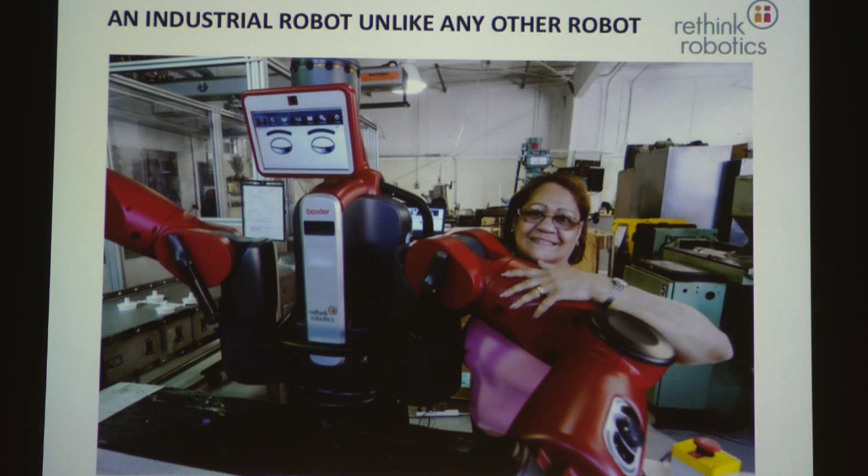Baxter is an industrial robot, and it's a little different from other industrial robots. I want to tell you how I came to this, how we came to this, the company Rethink Robotics. I'll show you some videos of it, show you how people use it, how you can use it as an industrial robot, some of the things it can do, and where we think it's headed.

This is a real factory worker in a real factory. She had met Baxter not too long before, and had learned how to train it to do tasks in the hour she had known Baxter, and she seemed to like the robot a lot.

So I want to tell you two themes which got me to the problem that we've been trying to solve at Rethink Robotics. We were originally called Heartland Robotics, but we renamed ourselves to Rethink Robotics. The two themes are human-centric robots and the question of how we manufacture our consumer goods. I'm going to talk about those two themes for a little bit.

Back when Matt and I were young, long before most of you were born, ordinary people couldn't touch computers. They were hidden away behind glass walls, hidden from ordinary people because ordinary people were dangerous to computers. Back then everyone smoked, including Matt - I think he still does. Everyone smoked, and the smoke particles would get into the disk drives and cause the disk platters to crash because they weren't sealed drives. So you had to keep people away.

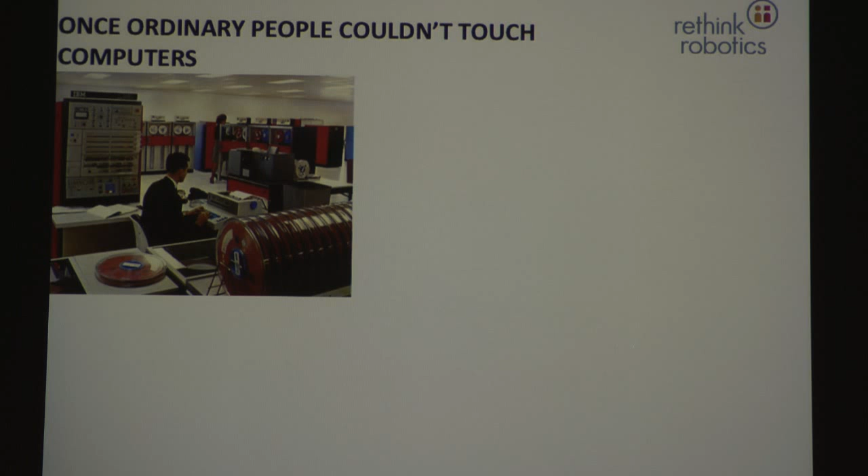But what it meant was, if you were an office worker, the only contact you had with computation was you might get this fan-fold printout with sales reports or something, but you couldn't get access to the information. You couldn't control how the reports were produced. That had to go to this priesthood in the back room - to systems analysts, to programmers, to punch card operators, to computer operators. But then around 1980, things changed, and ordinary people did get to touch computers with the Apple IIe and the PC that came along.

Over the next 30-some years, there's been a complete flourishing of computational forms. The amount of computation that everyone interacts with on an everyday basis has totally changed. It's been an empowerment of ordinary people. Ordinary people get to control information. They get access to it. They're part of the loop. It's not just fed to them.

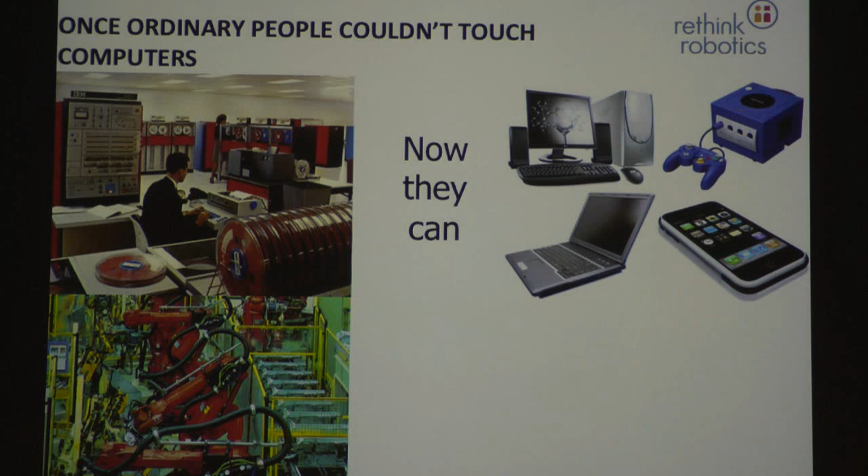So robots, especially industrial robots, are sort of like those mainframes. They're kept away from ordinary people, this time because the robots are dangerous to the people. We'll talk about that in a little bit. But what if ordinary people could touch robots?

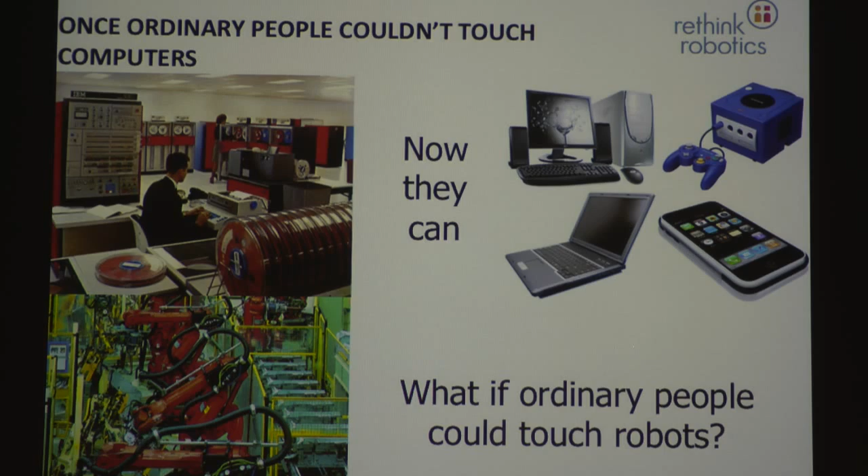Well, to some extent, they now can. Over the last 10 years or so, there have been a bunch of robots get out there that ordinary people can touch. The top left is the Intuitive Surgical Da Vinci, and a surgeon touches the robot. Now, you may think a surgeon is an ordinary person, and they may have a different answer than you do. But anyway...

Ordinary people touch the robot, and then the robot touches ordinary people. For guys like me and Matt in our age group, if we get prostate cancer, we're going to have a Da Vinci operate on us. That's the standard way it's done in the US now.

On the right-hand side are Kiva Systems robots from a company in Boston, which was recently sold to Amazon, where the robots move the shelves around at fulfillment centers, because robots can easily go in straight lines, pick things up, and bring them back, and the person does the hard task of grabbing out of the bin to pack out the fulfillment. Lots of things that you buy online now come to you through this robot system.

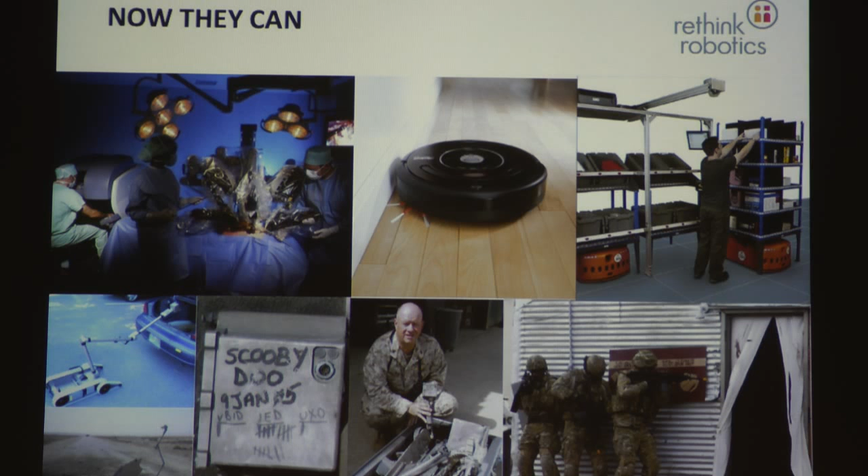In the middle is home cleaning robots - I'll talk about them in a minute. And then a big change in the US military in terms of ground robots over the last 10 years. In fact, in unstructured environments, there's been a tremendous uptake of robots over the last 10 years. Ground robots in the US military: June of 2002, zero, and now over 12,000.

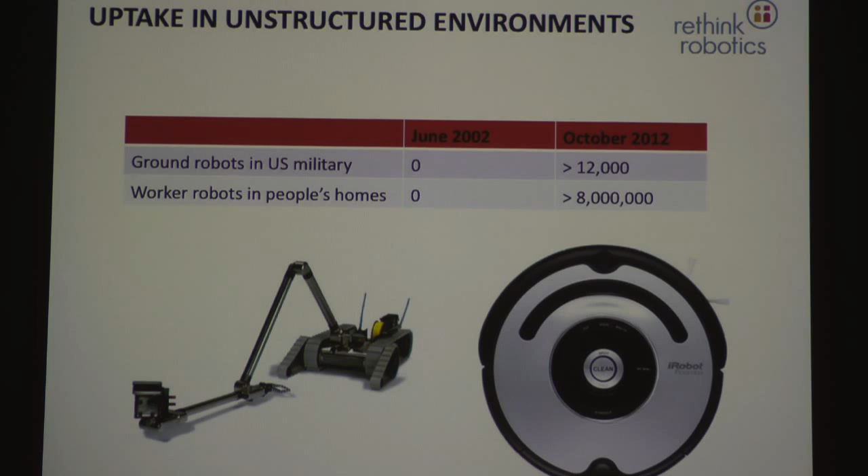Worker robots in people's homes - I said worker robots because I don't want to count the Furby, there were Furbies around before that. But robots that actually do work in people's homes went from zero to more than 8 million, just from iRobot alone. There are other companies that have also produced them; I don't happen to know their numbers.

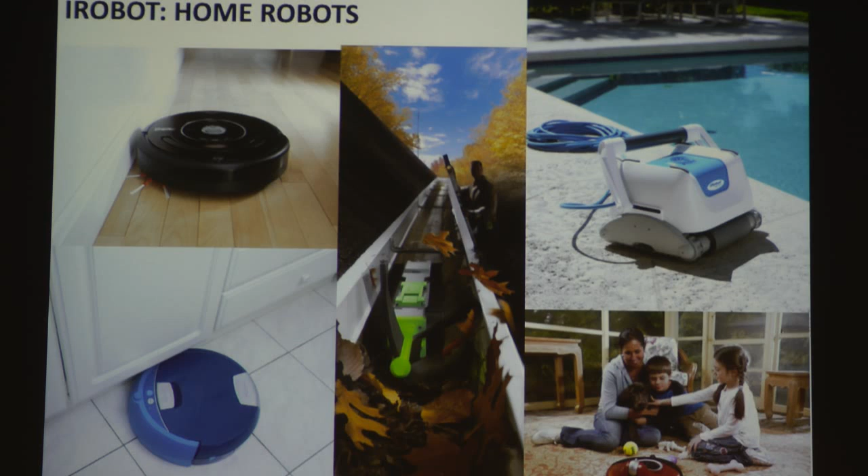Why have things taken off over the last 10 years? I think for a number of reasons. Computation has gotten, and sensors have gotten, exponentially cheaper for the last 50 years. We know about Moore's law. But sensors have also gotten cheaper and cheaper, driven by non-robotic applications. I don't suppose Hans Moravec is in the audience - is Hans here?

When I first came to the United States in 1977, I went to Stanford University, and Hans Moravec was there with a robot with a camera on it. The camera cost $50,000. He was trying to do stereo vision, so he had to mechanically drive the camera from left to right to get multiple images because cameras were so expensive, and computation took hours. But $50,000 for a single camera.

A couple of years ago, I saw a camera advertised online, a webcam, for $2.99. I checked, did it include the USB cable? It did, $2.99. I ordered half a dozen of them, I just had to see these things. And why order one and pay the shipping when the shipping was the same for $6? I got that camera, plugged it in. It was a pathetic webcam, but it was way, way better than that $50,000 camera from 35 years ago.

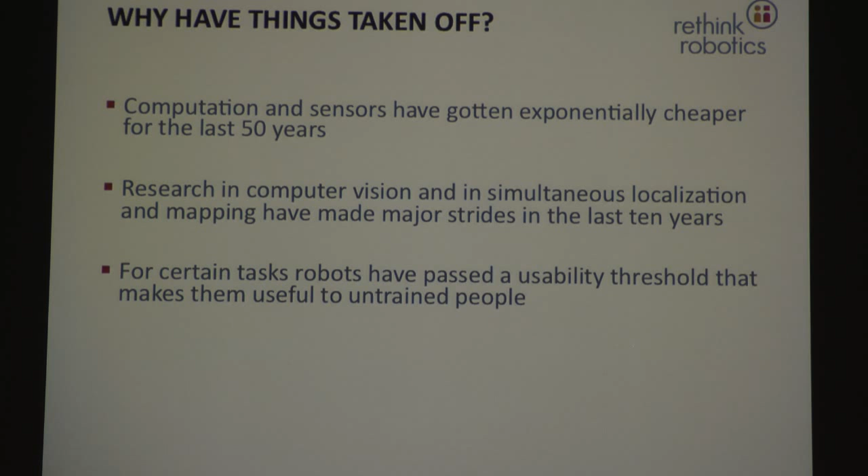Computer vision and SLAM, simultaneous localization and mapping, have made major strides in the last 10 years. That's a technology which has enabled robots to be more effective. And lastly, for certain tasks, robots have passed the usability threshold so that ordinary untrained people can interact with them. You don't have to be a specialist to use the robot for certain classes of tasks.

And I learned 2 lessons from the iRobot experience. I learned lots of lessons, but 2 that count for today. The first involved the fact that the Roomba on the right, that was the first Roomba, was not the first home cleaning robot. Electrolux had a €2,000 home cleaning robot out before the Roomba.

It weighed about twice as much. It was actually 13 centimeters high, so it didn't fit under the kickboard that you have in your kitchen, that your toes go under. It didn't fit under there, whereas the Roomba was only 9 centimeters high and did. But the important thing was the Roomba was $200 compared to €2,000. Disruptive price point. It went from being a luxury item, and in fact we chose the number $200 first before designing the robot because we realized that was the threshold at which a person could spend money without checking in with their spouse whether it was okay.

That was a serious thing because then it became an impulse purchase. But a €2,000 robot was not an impulse purchase, and it had to be much more useful at that price. So the first lesson is disruptions can create new markets, because people didn't think, oh, I want a robot vacuum cleaner. The market was created by it being disruptive.

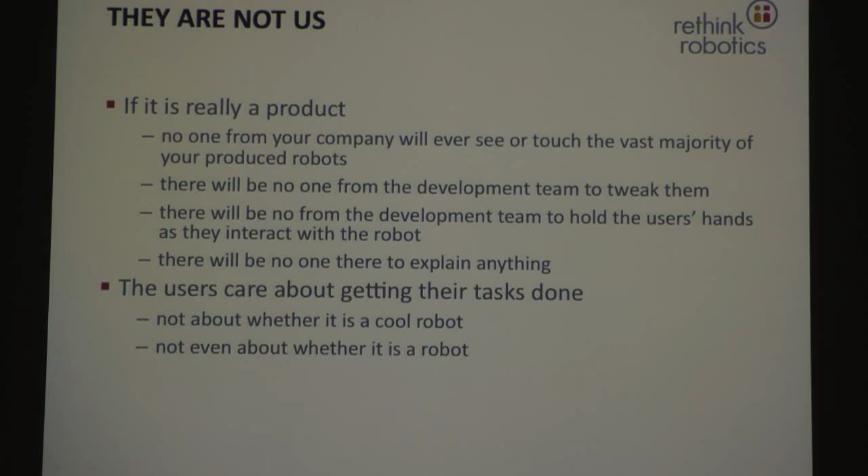Second thing is, the users only care about getting their tasks done. They don't care that it's a cool robot or not, they don't even care whether it's a robot. They want clean floors or something like that. Whereas technologists, engineers think, oh, but it's a cool robot, surely you're going to pay a lot for it.

Real robots have real users. That was the second thing that I learned. Real robots have real users. And so I class PhD students as unreal users. Sorry, but you are not real users. You're special, you're the ones who create the technology. That's not the end user. They're not us.

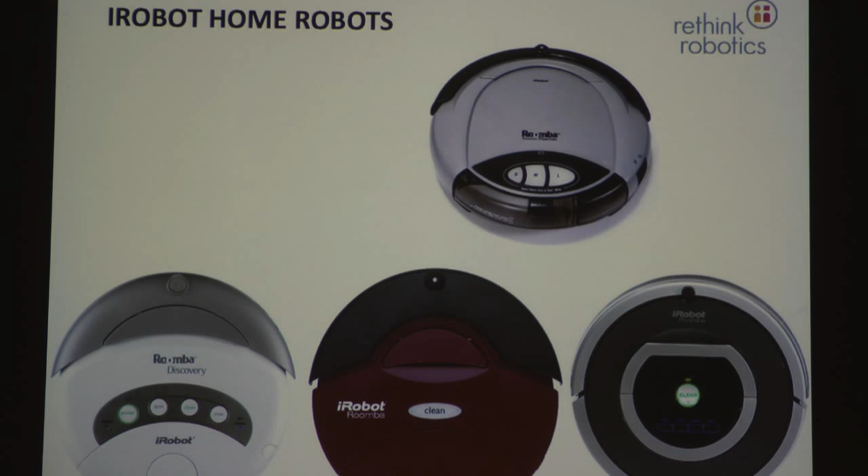So if you look here at the Roombas as they went from the top right across these later and later models, you may notice that the complexity of interacting with them got simpler and simpler. The first one had a toggle switch on the right for off-on. We got so many telephone calls on the support line: which way's on, which way's off? That was really hard. What does SML mean?

Small, medium, large room. So by the time we get to the bottom there, you can go deeper if you want, but the simple way to use the robot, there's just one button in the middle that says clean. There's no on-off switch, and this is important. You just press the clean button and it goes and does a task. You can specialize a little more with some other smaller buttons, but the simple use is just press the clean button.

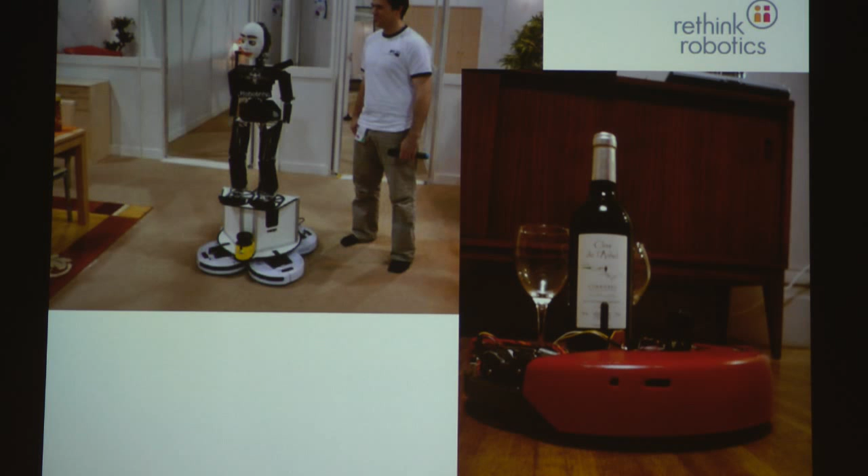Now, when you put robots out there, people do weird stuff with them too. On the left are the iRobot Creates, which we meant people to hack, we meant people to do weird stuff with. Other people just hacked them anyway, and they did variously interesting things or not. But they also used them sometimes in strange ways we didn't anticipate, and they didn't realize they were using them in strange ways.

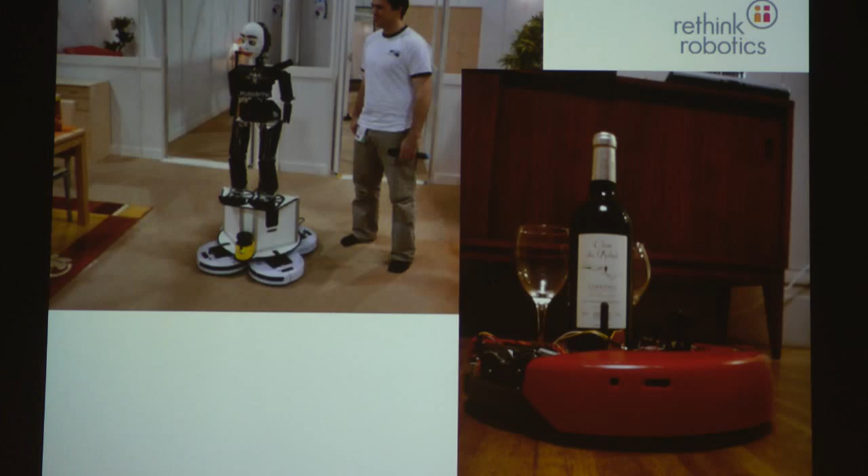One of the things we had was a virtual wall. If you want a robot to clean this floor and not go out that door over there, you put a virtual wall, an infrared beam, crossing the boundary, and the robot won't go out and wander off that way. So you can partition off parts of your house to keep the robot contained.

So one of our people was in Denmark and heard that at a government elderly care facility, all the floor cleaning was done by Roombas. This sounds interesting, let's go see how they do this. He went and saw the woman in charge of cleaning. She was very happy with her Roombas, she loved them. He just wanted to see how she used them, so he asked to watch.

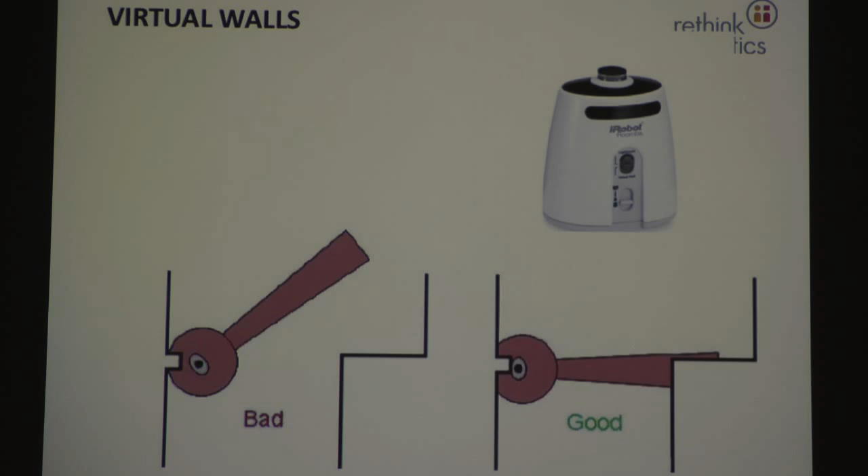The first thing she did was get a virtual wall, turn it on, press the clean button, and then put the virtual wall on top of the robot. She had multiple ones of them. And what this actually did, she had no idea - she thought that's how you were supposed to use them because she hadn't read the instructions.

Now, I don't know if people know the Braitenberg Vehicles, that book from 1984 about simple robots. She'd built Braitenberg vehicles out of these things so they'd stay away from each other and spread out and clean the floor. But that was purely accidental.

We also had a lot of robots in Iraq and Afghanistan dealing with improvised explosive devices. And they're real users - 19-year-old kids out there, soldiers, US soldiers, bullets flying past their heads, using these robots. Up until the early 2000s, the youngest kid in the squad had to put on a bomb suit, rope around their belly, go out with a stick and poke things, which ended badly often. Now, a robot has to be sent out.

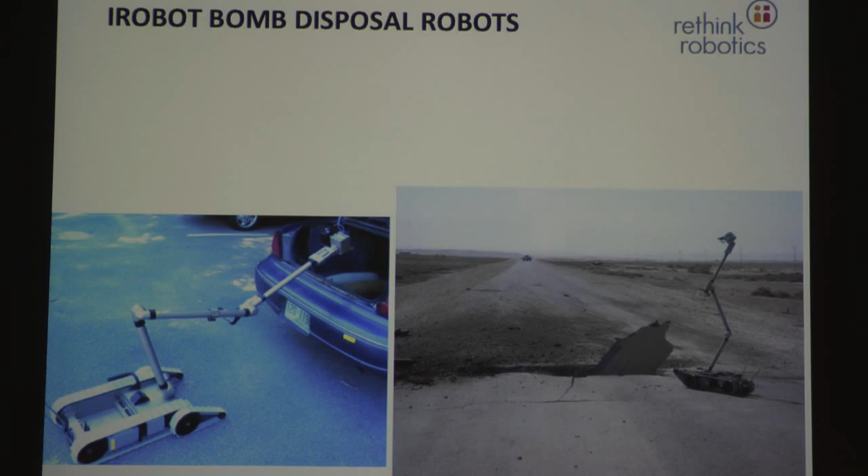There were two major sorts of robots in use in Iraq and Afghanistan, one from iRobot in Massachusetts, another from Foster Miller in Massachusetts. It's sort of surprising how the competitors come from right next to each other, owned by QinetiQ now. And we knew our robot was fully digital, had Ethernet. It was a much cooler robot than that stupid Foster Miller robot. It was a good robot. Their robot wasn't very good.

But word came back from the field that our user interface, which was really, really good, sucked - that was the word - compared to the Foster Miller one. Well, one of the iRobot engineers said, well, we need smarter users then. Okay, that wasn't the right solution.

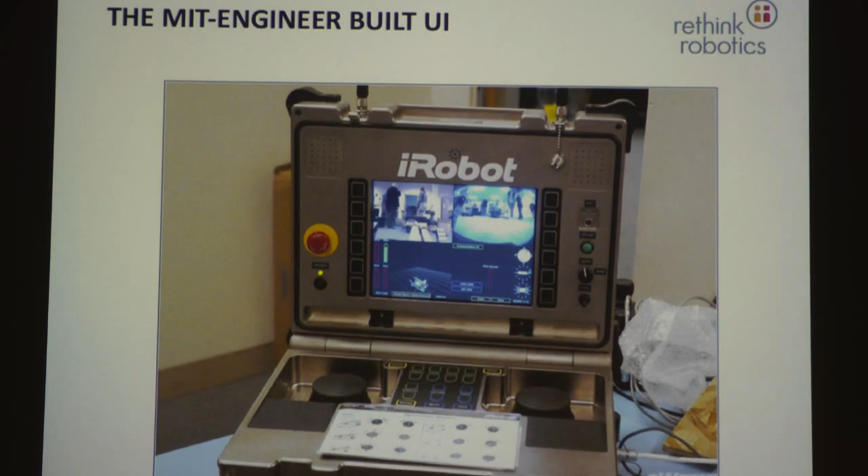The right solution was to put a game controller on the robots. Five minutes of practice without any documentation, and the people in the field got to use the robot effectively. They had maybe 85% of the capabilities of the robot - the engineers knew more, but they don't know how to do these other things. Before, with months of training with the complex interface, they never got to 85%. Now they got to 85% in 5 minutes. It's like the clean button. Match something to where the users are in order to make it usable, and you get much more effective use and much better uptake.

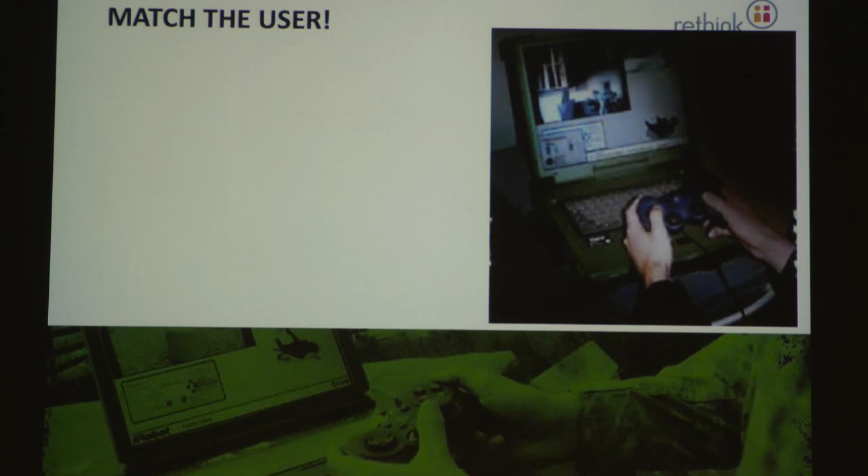That was the first theme, user-centric robots. Second theme: I had been going to China since the mid-90s to look at low-cost manufacturing, first to manufacture robot toys, which we used to make, and then to manufacture Roombas.

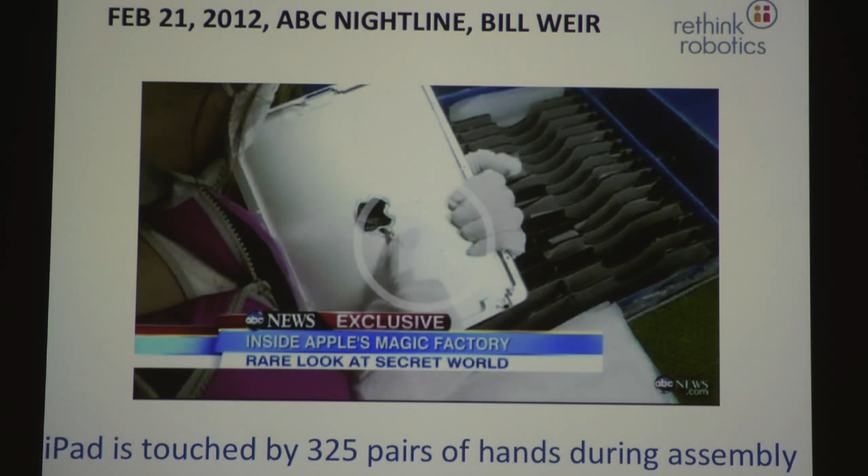February of this year, ABC Nightline did a report on how iPads are built, and they pointed out that 325 pairs of hands touch an iPad during assembly. So the stuff we buy, the consumer stuff, is still made by hand.

What year is it again? Still made by hand. Lots of things have been done by hand in history, and then they're not. A lot of farming used to be done by hand, and now it's done by tractors, etc. But there's other stuff that used to be done by hand.

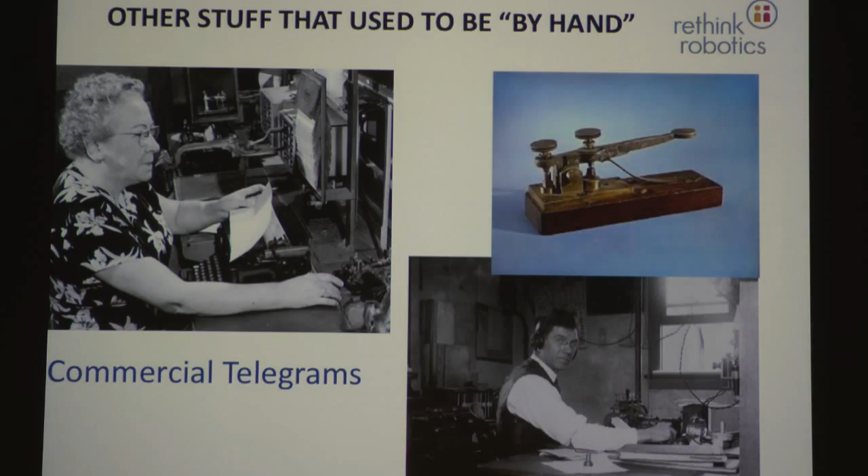Has anyone heard of telegrams and the telegraph? Commercial telegrams: there was a person who would read stuff and use that key in the right-hand corner to turn words into a signal that went over the line, and then another person would listen to the signal, transcribe it, and get the telegram out. Does anyone know how long we used telegrams for in this country? They sent messages by hand.

We started January of 1838 - that's when the first commercial telegram was sent. Anyone guess when the last commercial telegram was sent in the United States? 1979? No, it was January 2006. Good try, but it took a damn long time for the internet to kill off those telegrams. The internet's a little faster than telegrams, but eventually it did.

So my question is, after 168 years, when will we stop building our stuff by hand - the stuff you buy at Walmart? When will we stop building that by hand and use machines instead?

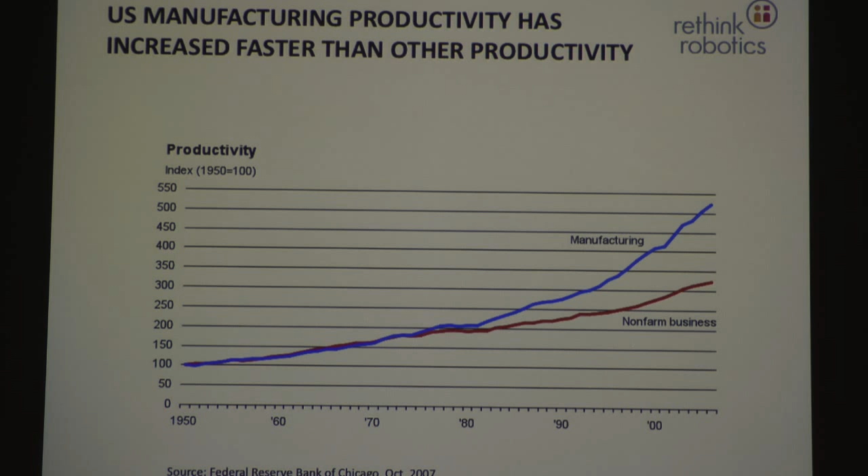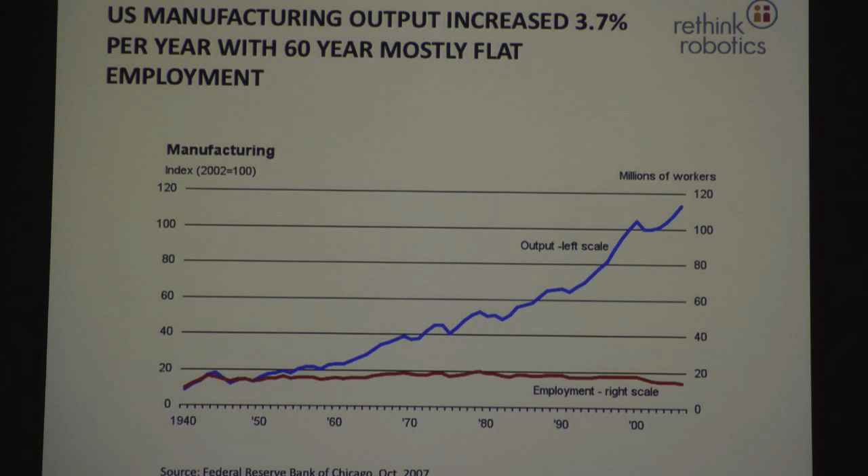By the way, US manufacturing productivity has increased faster than other productivity in this country - it's increased very, very well. US manufacturing output has increased roughly 3.7% per year for 60 years, which is a pretty good run of increase in productivity, with mostly flat employment. It's gone down a little recently.

In fact, there's a great statistic - the cost of an airplane for the US military versus the US defense budget, and they cross in 2054. The whole US defense budget at current projections will buy one airplane. Now, fortunately, the US defense budget's a big number, so manufacturing will still be healthy, but that's obviously not sustainable.

Since World War II, we have outsourced manufacturing to low-cost labor regions - first to Japan in the wake of the Second World War, and then as things got back together there and the standard of living went up, it moved to South Korea. As the standard of living went up there, it moved to Taiwan, then to southern China. By the time I was building toys in China in 1998, 1999, the plush sewing part was too expensive to do even then, and had already migrated down to Vietnam.

So there's this constant move to low-cost labor, and behind it an increase in standard of living, and new consumers come up behind. Well, where do we keep going to? Meanwhile, Thailand has had a total industrial revolution in the last 30 years. As manufacturing spreads to Indonesia, Malaysia, you're sort of running out of places to exploit.

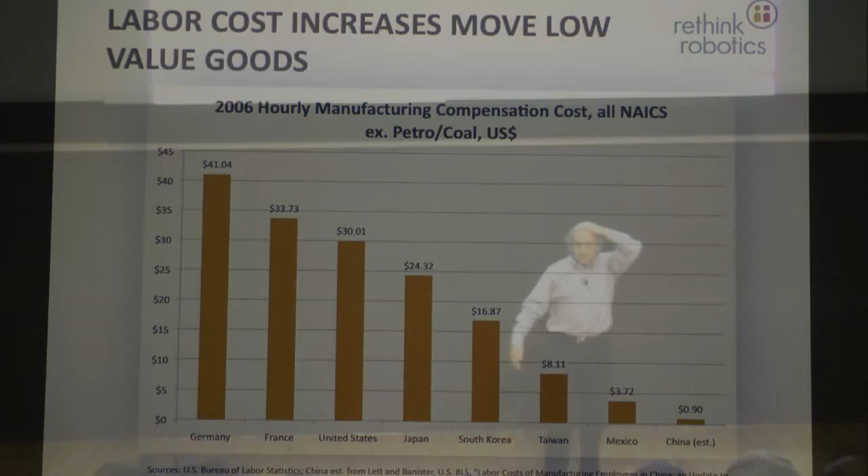In fact, you can see the history of manufacturing in the hourly cost of labor - you can see exactly the march, and these numbers keep coming up. This is from around 2003, 2004, or 2006 - 90 cents an hour was the total cost of manufacturing in China. It's now up to about $3. It's increased rapidly, and you've probably seen stories from Foxconn, which makes the iPad and iPhone, that wages have gone up dramatically in the last 2 or 3 years there, because the workers are saying enough's enough, we need to be paid better for this.

So what will it take to break out of making cheap stuff by hand? I'm a robot guy - the answer is a robot. Ask me any question, the answer's a robot. I admit it.

I wanted to say, we've sort of gotten into this thing here in the US where we talk about advanced manufacturing, but I think we make the mistake that advanced manufacturing means manufacturing advanced stuff. You can also use advanced manufacturing for manufacturing low-tech stuff like saucepans, etc.

I gave my punchline of robots three slides too early. Sorry about that. It's a brand new talk. It really is.

But there's also a bunch of pressures saying that we should manufacture in the US. One is responsive short supply chains. When you manufacture something in China, you have to say 29, 30 weeks ahead of time how many you want of a particular item to appear on a store shelf 29 or 30 weeks later.

And by the way, now every retailer wants their own pack out. So the Costco box has to be a different box with a load more stuff in it than the Sears box or the Bed Bath & Beyond box or whatever. So 30 weeks ahead of time, you're not only predicting how many things you're going to sell, but how many you're going to sell them in each retailer. And at iRobot, we were making stuff for Linens 'n Things, and they went bankrupt before the stuff arrived.

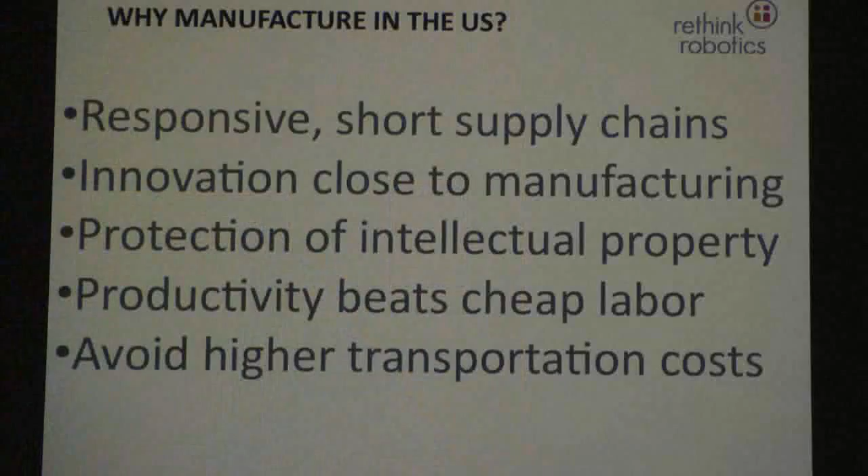And lastly, the only prediction I will make, I won't predict whether our robots will succeed or not. I predict cost of oil is going to go up in the long term. I'm confident of that prediction. And in 2008, when there was a spike in oil prices, most retailers in the US lost their margins completely to oil surcharges. There's all these reasons to bring stuff back to the US, and now my answer, combining these two themes, we'll use robots to do it.

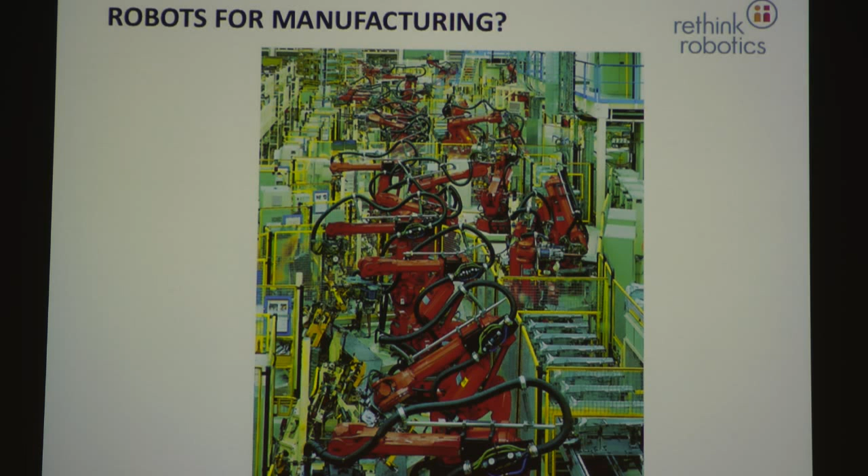Okay, that was what I was trying to get to, but these robots can't be the same sort of industrial robots we have today, the mainframes that are away from ordinary people and ordinary people can't interact with or program. The world's first industrial robot, by the way, was the Unimate, made by a company, Unimation, Universal Automation, first installed in a General Motors factory in New Jersey in 1961. Later, Unimation was bought by a Pittsburgh company, Westinghouse, and then sold off to Stäubli.

But back in 1961, there were a bunch of technology limitations. There was no computer. Computers were too expensive. They used ladder logic. And there were no sensors. So the robot did the same motions repetitively. And industrial robots, to a large extent, still do that. They don't have sensors on them. They don't come with many sensors. You have to get a systems integrator to put other sorts of sensors and software packages.

But they're unsafe for people to be around. They're engineered to be precise and repeatable, and what they do well, and they do amazingly well, is follow a trajectory accurately, repeatedly. They'll follow the same trajectory to 0.3 millimeter accuracy for 10 years nonstop. But they haven't been made adaptive or flexible or easy to use.

And you have to really structure the environment. You have to clean it up to let them operate. And the integration cost of getting the robot into the factory is 3 to 5, some people say as much as 10 times the capital cost of the robot because of all the other equipment you have to do, the way you have to reorganize your factory.

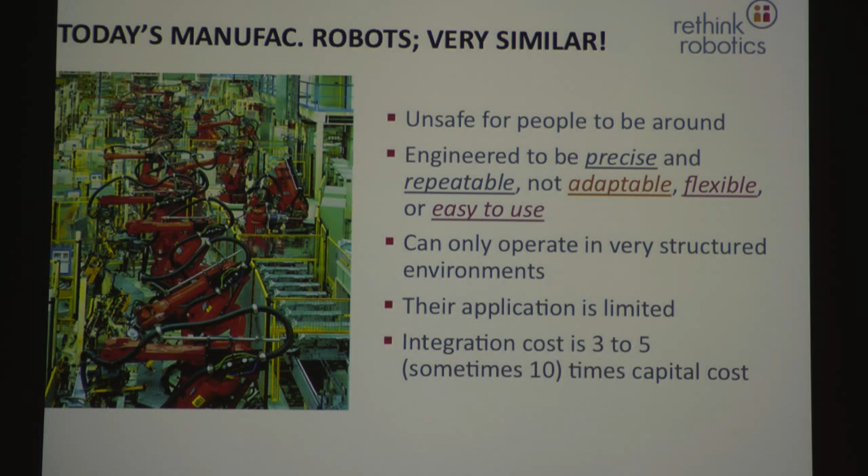So the industrial robots of today are nothing like what we see in our information technology. The information technology revolution hasn't come to industrial robots. And in fact, there's over 300,000 small manufacturing companies in the US which don't have robots because the cost of entry, the barrier to entry is just too high. They're too hard to use. You need consultants who understand quaternions in order to use them.

Now, everyone here at the Robotics Institute understands quaternions, but out there, in the real world, ordinary factory workers don't understand quaternions. Actually, maybe only Mike Erdmann understands quaternions, I'm not sure. And so the cost of getting them there, they only make sense for very long production runs.

So I decided that we would try to do something about these problems, make it easy for robots to go into factories. I started this company, now called Rethink Robotics, in September of 2008. It's based in Boston, Massachusetts. It's venture-backed. We announced our first product on September 18th, and we're just starting shipping now. I'll talk about supply chain in a minute.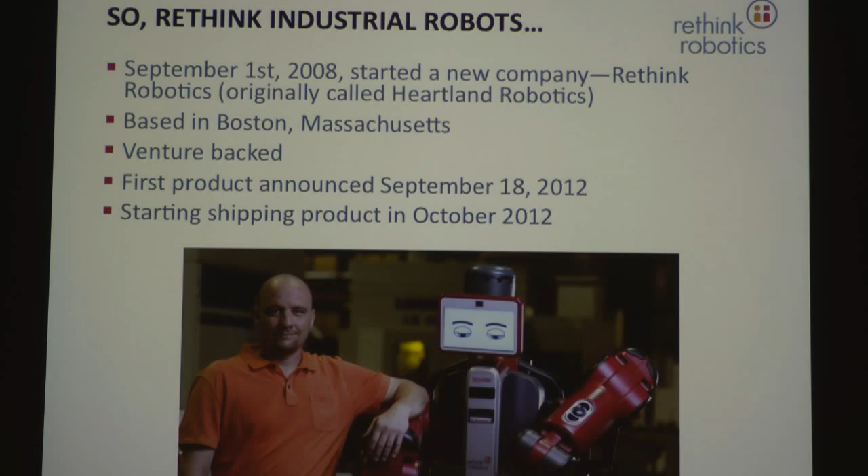We have had two visions. This will sound a bit like advertising, but it'll turn into technical stuff in a minute. We wanted to change robots so they could work with people easily and be very low cost. That gets back to disrupting a marketplace. Our idea is not to compete with current industrial robots, it's to go into those 300,000 American companies that don't have industrial robots right now and make it very easy for them to adopt one. So we're trying to make it easy to get robots into factories to keep jobs from migrating overseas.

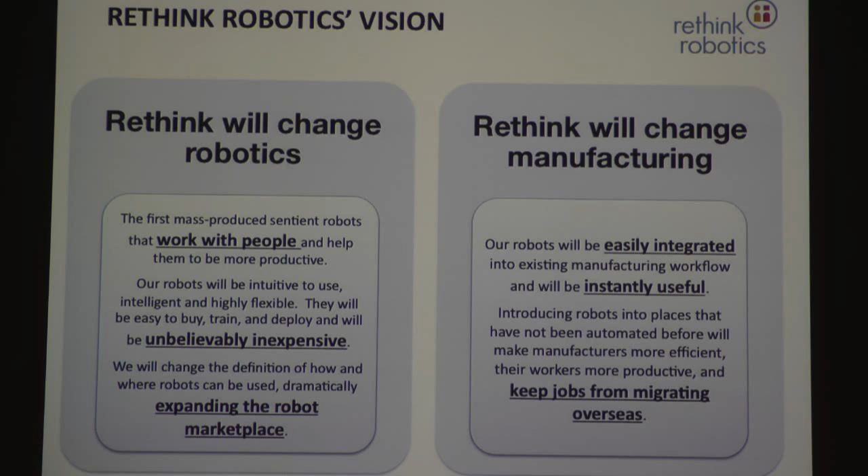It's got two 7-degree-of-freedom arms, each with force sensing, series elastic actuators. It's got cameras in each wrist, two cameras in the chest, and a camera above the face.

You don't need anything else to train or program this robot. You just go up and grab its arms, there's some knobs on the arms and on the sides if you want to twist them. And that screen with the eyes on it turns into a graphical user interface while you're training it.

The arms are compliant, so it's safe to be close to the robot. About a 5-pound payload, spec at maximum acceleration, straight out like this for 6,300 hours straight is what we're trying to do. And you can put on different end effectors, I'll talk about that in a minute.

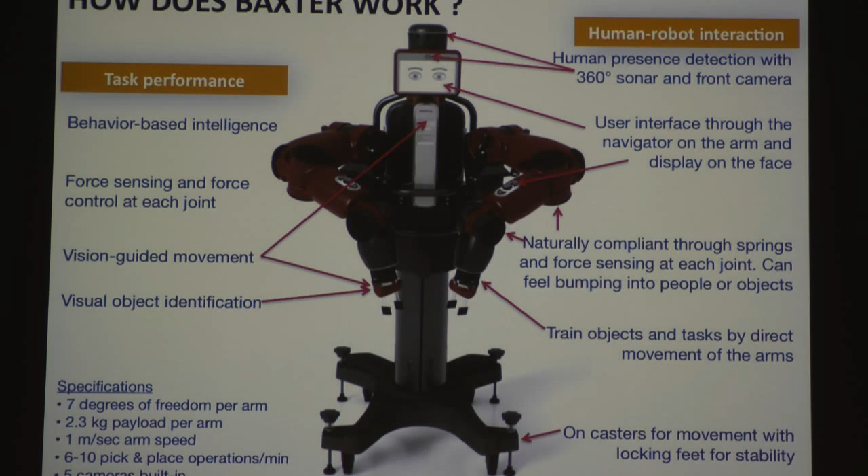It is not actively mobile. There's a base you can get which has casters, so you can push it around and set it up at a new workstation. The idea with this robot is you take it out of the box, set it up, and an ordinary factory worker trains it for some task in 5 or 10 minutes, and then it starts working. When 2 hours later you want it to do something else, you roll it somewhere else and get it to do a new task.

So it's a new category of industrial robot. No systems integration, the only interface it needs is a wall socket, a 110-volt wall socket. No programming, you don't program the robot, you train it, and I'll show you some video of that in a minute. It should be fast so you can change what's done on the line.

I was at an event, as was Matt last week, where one of the traditional robot companies said, yeah, we see the need for lines that get changed after only 4 months. But in these small factories doing small batches, they need to change their lines every hour or two, and that's what we're trying to do.

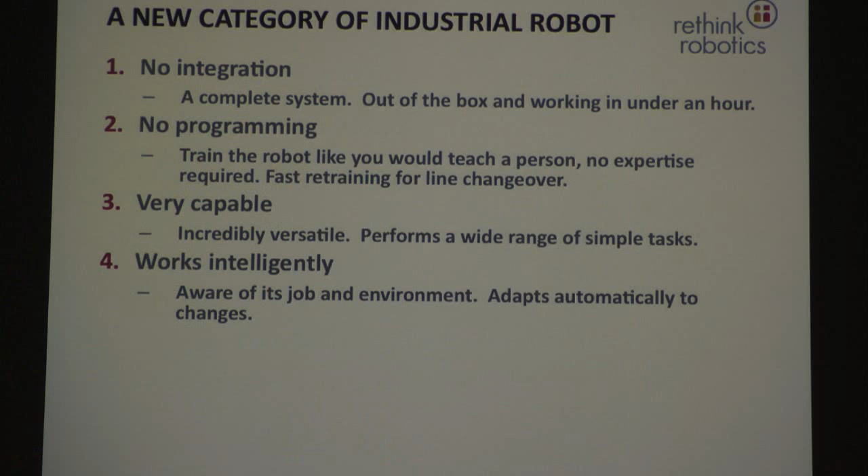Wide range of simple tasks. It's aware of its job and its environment, it's not just a machine unaware of what's happening. It knows about people, it knows about conveyor belts, it knows about boxes, it knows about certain categories that are in factories, and it adapts to changes.

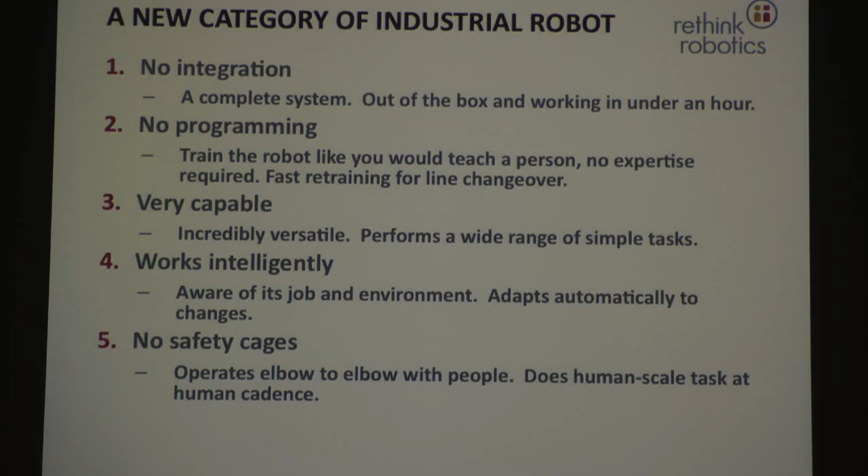Most importantly, it's such a nice robot you can be this close to it, right up with it, and it's not scary. I may be scary, but Matt doesn't scare me. So you can be elbow to elbow with it without safety cages.

And it's an extensible platform in that new software will come out and new people will build apps for it, which will increase its capabilities on the basic platform. So just a few technical things about it.

It has series elastic actuators at each of its joints. In a series elastic actuator, there's an elastic element somewhere between ground and the load, and you can put them in different places. This was an idea developed by Matt Williamson and Gill Pratt. Matt is at Rethink Robotics.

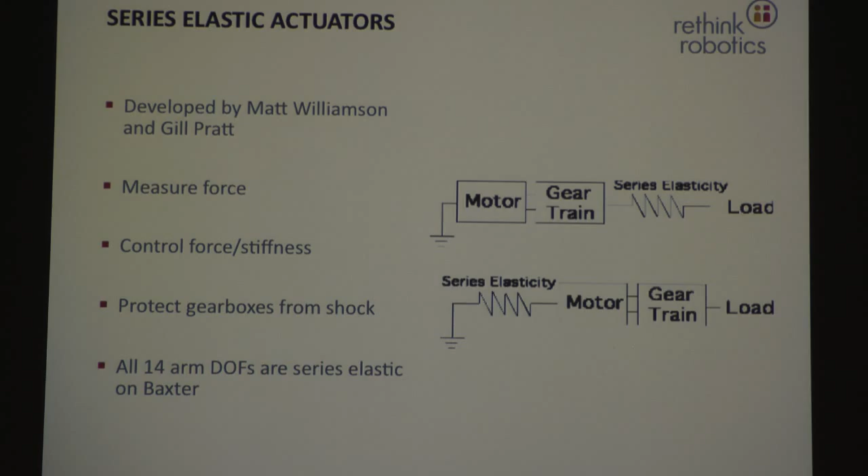Many of you probably know Gill Pratt, who's a program manager at DARPA funding a lot of robotics work now. You can measure what's happening on either side of the spring, so you can use that to measure force with Hooke's law. You can control force and stiffness, and there's gearbox protection from shock. So we've got 14 series elastic actuators on the arms.

By having series elastic actuators, the arms have some natural springiness. With a servo loop, you can change that springiness, stiffen it up artificially at low frequencies. You have a high frequency servo loop, say 1,000 hertz. You can stiffen it up at a low frequency, but you can't get it as stiff as a big rigid industrial robot. So you don't have precise control. There's always some flexibility in the system, but you can vary the compliance.

So what that means is this robot is not great at precise tasks, just like Matt is lousy at precise tasks, as we all are. We're really lousy at precision tasks. We use force sensing, we always use force to do alignments and find a cone down which we go in order to get things accurate. Same is true for this robot.

So the way you interact with the robot, on the top left there is one of its cuffs. It happens to have a suction gripper on there rather than an electric gripper, but there are two buttons, a round button and a lozenge. Matt, can you just stand up for a second?

Face this way, so, to be a robot. Okay, so the way you train this robot is you come up, you grab the cuff, and the robot's arm immediately goes into gravity compensated zero force mode, so you can move the arm around anywhere. You touch these buttons here in order to give commands. Then there are buttons here. This face always points this way. And I can twist the knobs and use the graphical user interface. Thank you.

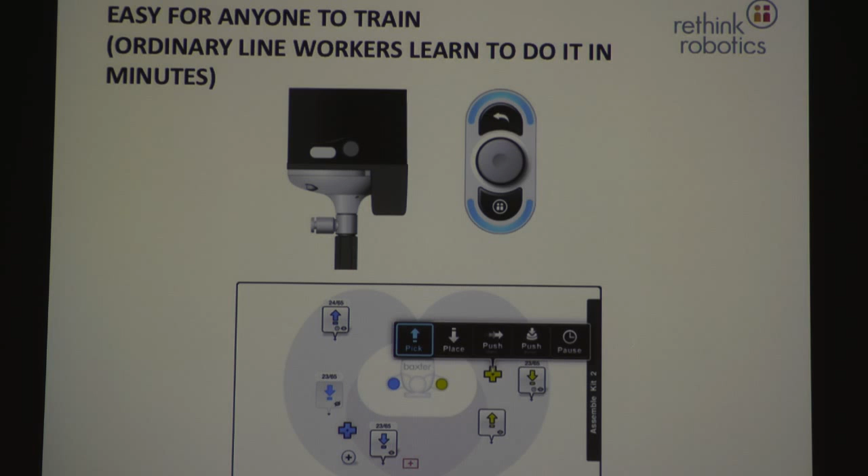So there's a sequence at the bottom of grabbing the arm and going to zero force gravity compensated mode. I'm just going to show you a videotape where someone walks up to a robot, makes a mistake first and then corrects themselves, and then programs the robot to do a very simple task in a few seconds.

So here comes someone, he grabs the robot. Actually he made a mistake, he's got to delete, goes back, starts again. Now he's going to train this robot to do a simple pick and place. He puts the arm down and says suck, and lifts it up. The robot figures out, oh, that must be a pickup. He puts it down, he says let go, don't suck. The robot's now inferred there's a pickup location and a put down location, so very simple task. It's going to go pick up and put down where he said. And there's safety behaviors and error recovery behaviors.

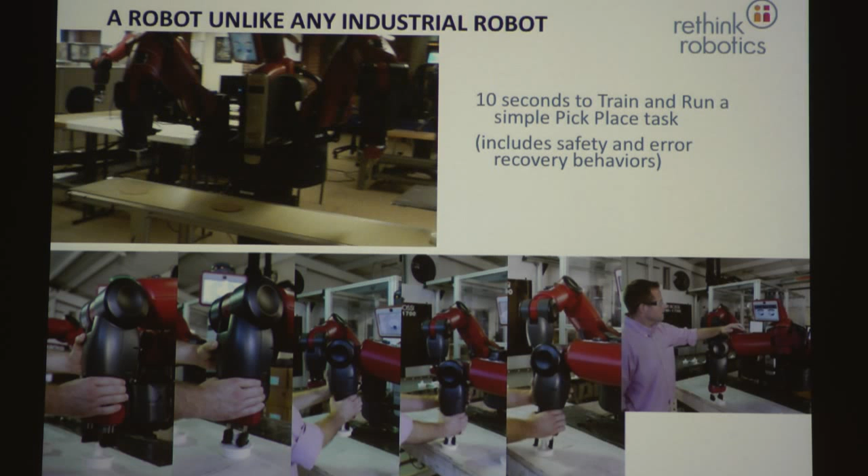I'm going to go into a lot more detail with a better video in a minute to show you in more detail how you do that. So with this very simple programming methodology that you don't need training in order to use, we just let ordinary factory workers play with it, and we're able to get the robot to do useful tasks in factories. Here's actually the robot packing its own gears in boxes. By the way, the gears are made in Western Pennsylvania.

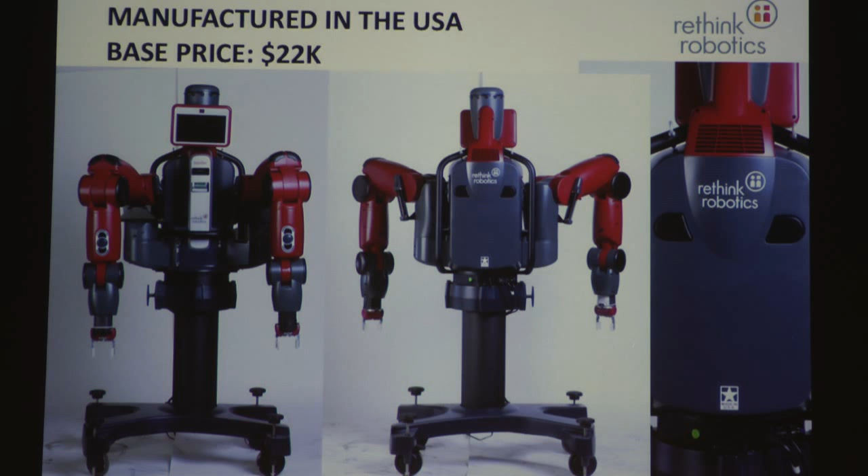So this robot is $22,000 for the main robot. There's a little more for the base and the grippers, and it's made in the USA, on the right there, that sign. This is about the complexity of a car. How can we build a robot for so inexpensively?

Well, a bunch of things, and this is true of anything you want to build in the US. We designed it to be manufacturable. We started looking at every supplier and every technology and made sure our design didn't push it too hard, so that it was easy to manufacture. We have a distributed supply chain in 12 states and one province of Canada, where modules are built by specialists. So the gears, as I said, are built in Western Pennsylvania. Why would we build the gears there? Because of Penn State University. I'm sorry, it's not CMU, it's Penn State. In their material science, they have really worked on powdered metal, so we build the gears out of powdered metal rather than steel. They have the technology around there, so there are a whole bunch of startups around there that can make those things. So we build them locally around the country where there are specialists.

We have testers and calibrators in every place, so we test the modules and the pieces. The powdered metal gears are one example of rethinking the materials we use, just like the Boeing 787 is built out of new sorts of materials and has become much cheaper as a result. Another thing we use is some of the gearboxes have plastic housings to hold the gears in, plastic impregnated with glass, because now that material technology is precise enough that you can build gearboxes out of them. You wouldn't have necessarily thought to do that in the old days for an industrial robot.

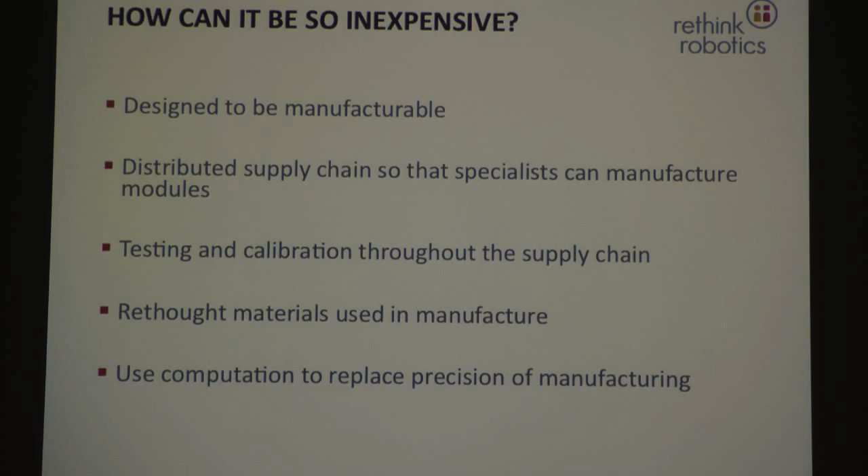Lastly, where we can, we use computation to replace precision. Mechanical stuff doesn't get exponentially cheaper. Computation gets exponentially cheaper. So when you can use computation to have forward models of gear backlash and make predictions of what's going to happen in the gearbox and run that in real time, you can get away with cheaper gears and cheaper components by using computation. You have to have good control theorists to do that.

Now, who here has an industrial robot, a standard industrial robot? Matt. Actually, no, we'll do this guy. You have a standard industrial? Oh, I work in that. Oh, that doesn't count. Well, I'll ask him anyway. He doesn't know the question.

How high can your industrial robot jump? Zero. Well, yeah, and it's the wrong question, right? It's the wrong question for an industrial robot. But recently Honda announced their Asimo 2, and one of the specs they give is it can jump, I think, 3 millimeters or something. They're very proud of how high it can jump. That's showing its agility. And Mark Raibert at Boston Dynamics has these little hopping robots that can go up 20, 30 feet. So for some robots, how high you can jump is an important metric. It's not for an industrial robot.

So for current industrial robots, the right metrics, which all the manufacturers talk about, are precision, repeatability, and speed. But they're not the right metrics for our robot Baxter. Our metrics are about how adaptable it is, if the world changes, how it can compensate, how flexible it is, how easy it is to use, safety, inexpensiveness, and throughput. Throughput's related to speed, but it's not the actual speed of the moving it. It's throughput, how long it takes to set up the job and get your 10,000 units finished. So a different set of metrics.

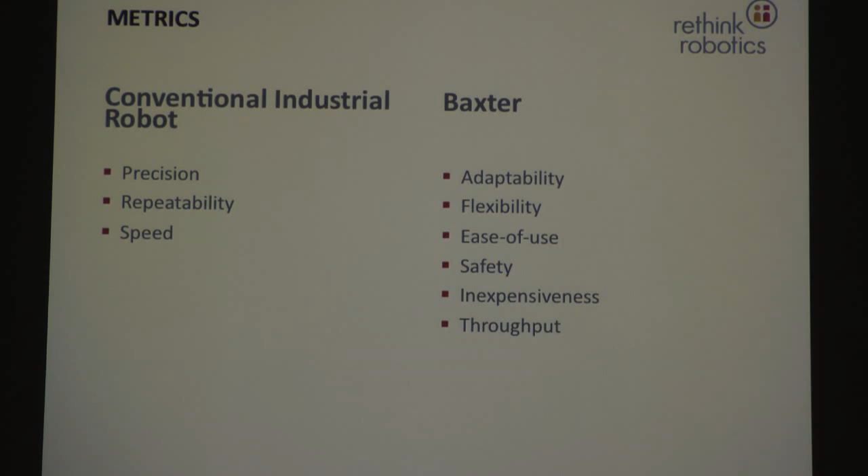And Matt, you said there's no guarantee that our robot is a revolution, and I absolutely agree. Whether we can convince people that these are important metrics is an unknown question yet, because they are a different set of metrics, and we'll have to see.

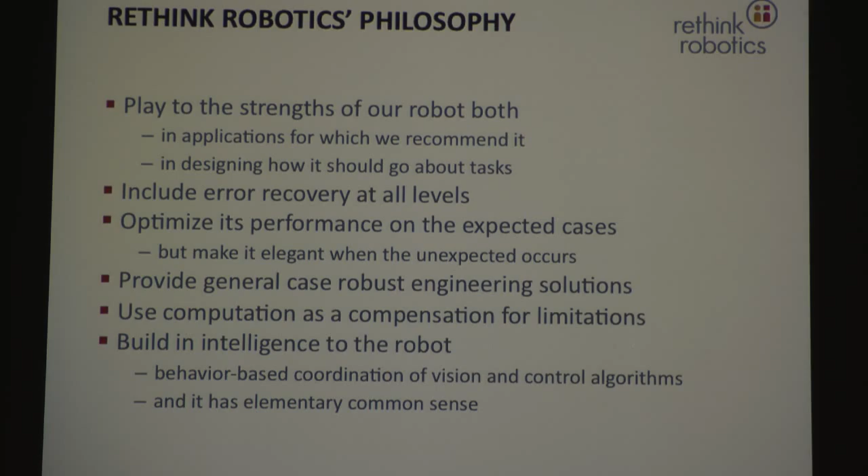So we had a philosophy that we should play to the strengths of our robot. It's force controlled, not position controlled. That's a different way you have to think about it. But we have error recovery at all levels built in, and we try to optimize its performance on the expected cases and have it do something elegant when something unexpected occurs, providing general case robust engineering solutions. It's got this built-in intelligence, this behavior-based intelligence that coordinates vision and control algorithms, and out of that comes an elementary common sense.

So the robot knows, for instance, that if there's nothing in its hand, it doesn't need to put it down. So if it's going to put something down somewhere and you come and grab something out of its hand, it doesn't then go and put its hand in the box to release this thing—it doesn't have it anymore. Likewise, if it knows it's supposed to insert something over here, it knows through common sense, well, first I have to acquire it. And if there's nothing here to acquire, I'll just sit here and wait until there's something to acquire, then I'll put it in there. And that, by the way, means you don't have to teach the robot a task in order—you can just teach the parts, and it puts it together through common sense.

Another common sense example: a lot of traditional robot programming for industrial robots is building in the edge cases, but this robot has a bunch of common sense around it. If I'm programming Matt, I'm going to show him a task. Suppose he's a person.

Suppose he's a person, and I could show him what to do with each hand, and I say, Matt, be really careful you don't let your arms collide with each other. For a person, that's common sense. But if you're programming a robot, you have to make sure that is done. So we put all that in the base level software that's just there.

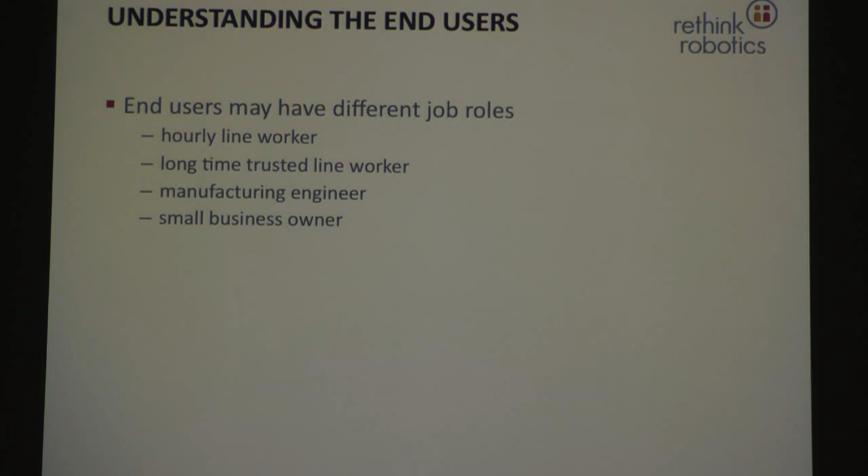Lastly, the end users can be very different. There are different sorts of end users in factories, and orthogonally to who they are, they have very different styles of using any machine. The small business owner might be, just tell me the recipe, and the line worker might be a real gearhead wanting to understand how something works. So different sorts of people have different ways of interacting, and I was trying to show you that in the videos.

But the important thing that I keep telling my team is, don't outsource hard engineering problems to the end user. Don't say, oh, the user can deal with that. Because the more stuff you lay on the user beyond about one little thing, it starts to be not much fun to use the robot.

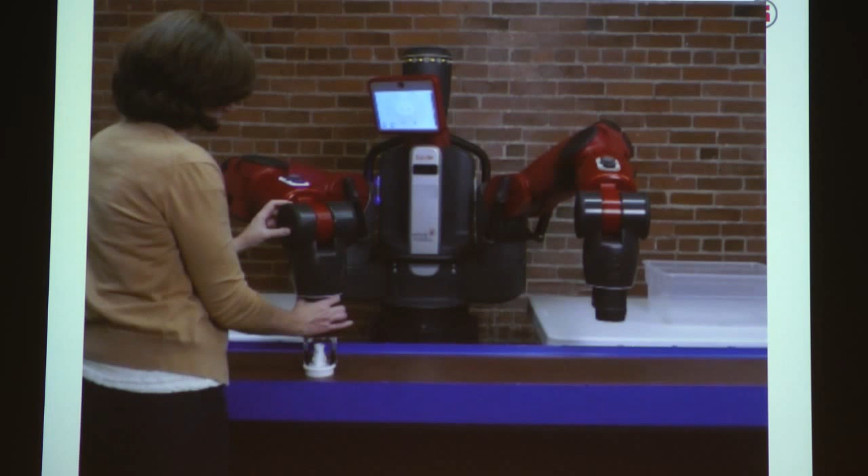Okay, so here we're going to train a blind pick and place. So this is not using vision. Here's Noelle. She goes down, she grabs the cuff, goes into zero force mode. She clicks the button that says close the fingers. So the robot just figured out, oh, she meant to pick something up there. So it inferred a pickup location. She released the fingers below, and now she says run. And so it inferred the pickup location, it's going to do it blind, so there better be something there.

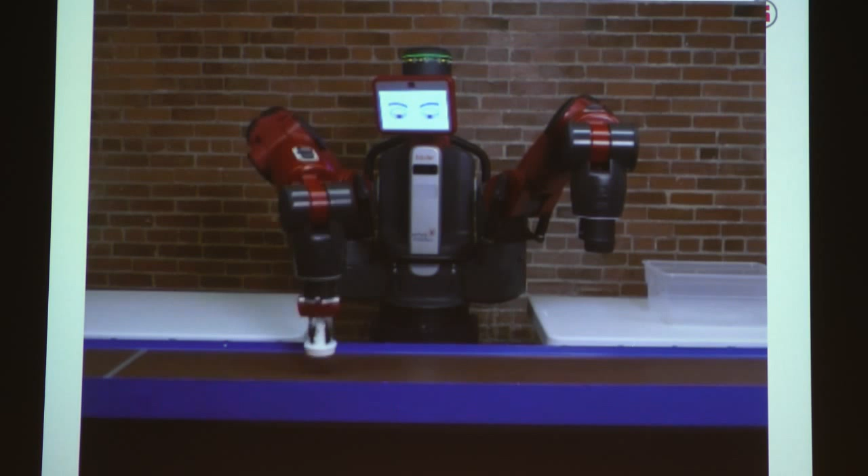We'll come to vision in a minute. It's going to do a pickup. Now it's going to go over to where she trained the put down, but she sort of trained it with a bad kinematic posture, and the other arm was nearby, so it decides to readjust the kinematic posture and get that other arm out of the way. There's a force field around it, so it stays away. That force field is used so that the arms can never collide.

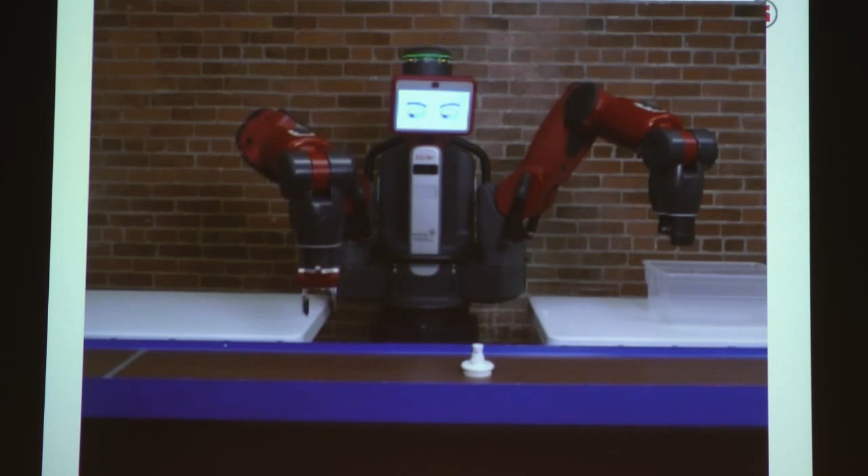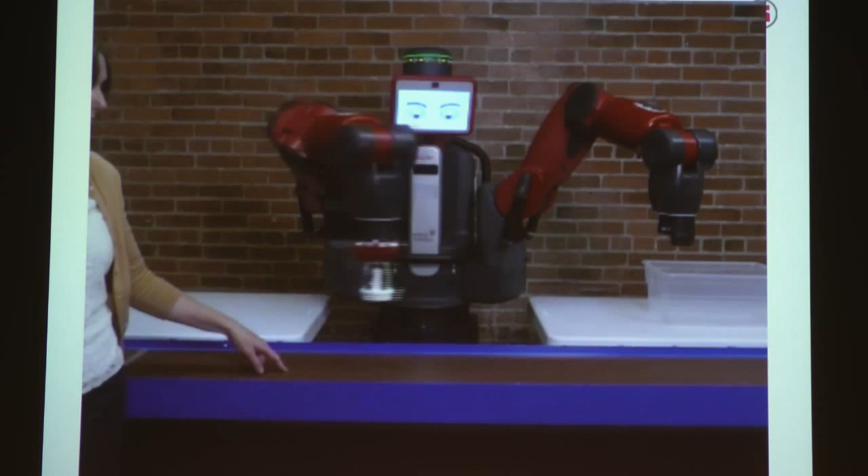Okay, so now it's coming down, it's going to pick up another one. Oh, but there's nothing there. So it's going to try again. It realizes try again. It looked a bit puzzled there with its eyes. It glances over where it's about to move. So if you're near it, you know what it's about to do because its eyes tell you what it's about to do.

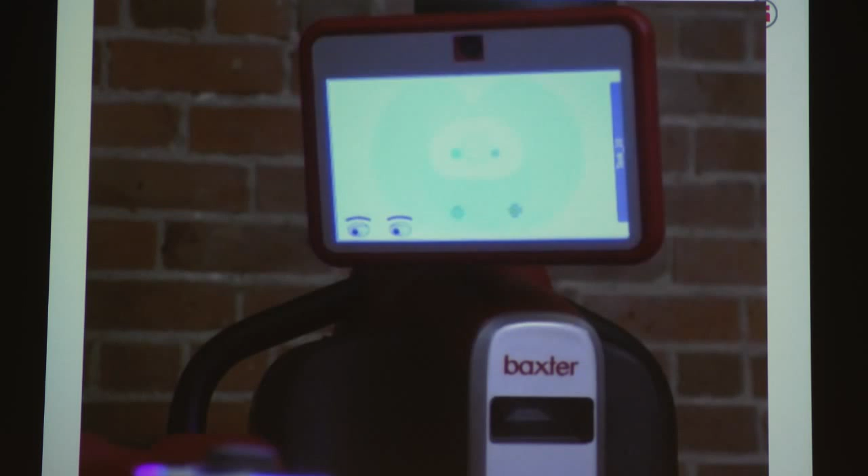So here we're going to see on the screen the training, new task. It's a little hard to see, unfortunately washed out, but the left plus sign is the position of the right arm, and the right plus sign is the position of the left arm. It just inferred that was a pickup. Now she's going to put it down. It says, yeah, I got that. Yeah, that's a put down. And so that's the pick up and put down.

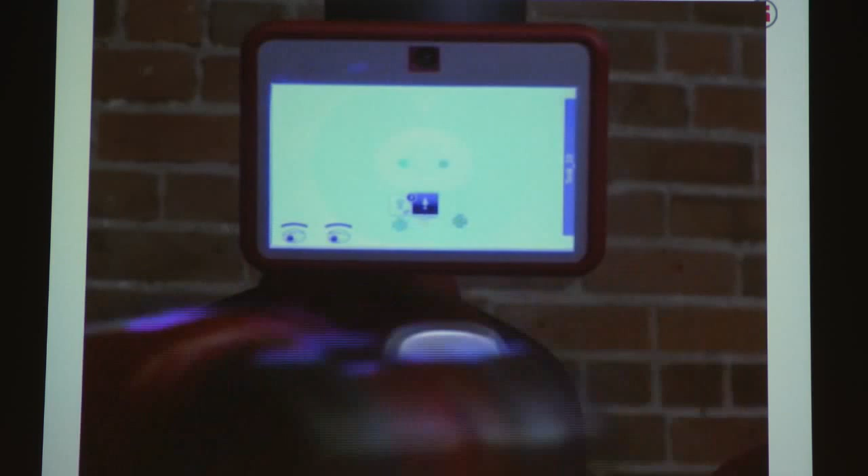And so that was the same task she just trained, but seeing what happened on the screen. She says run, and now it's going to run. Now it's going to put down, feels a force, let's go now. Oh, there must be a surface. I thought the surface was lower, but there's something there, so I'll put down.

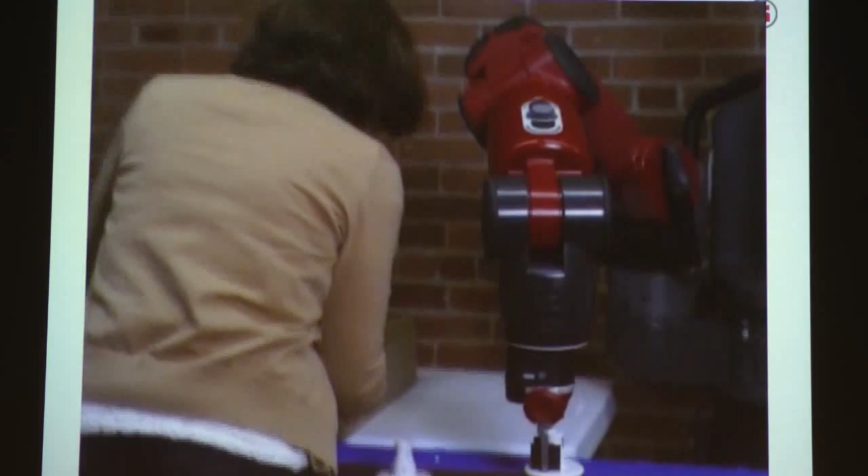Okay. So the robot is safe to be close to. Next time Matt comes up, I'm going to get Matt to do this.

So the user interface, the two slogans we try to keep for ourselves as we design the user interface is that it knows what you mean and it does what you want. And simple things are simple to train, but you can go into deeper menus if you want to make stuff more complex. So when you do a transfer from one place to another, it's going to assume a default height. But if you want it to be more, you can go in and say, no, I don't want you to go up 22 centimeters, I only want you to go 10 centimeters up from the table. And you can go in and change all those parameters if you must. It'll do something default, which isn't too bad, but you can go in and control it to a deeper level.

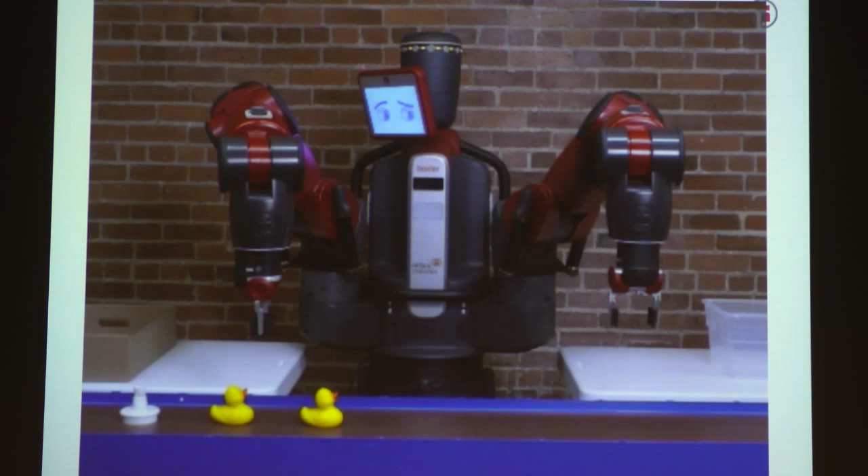So here's a task with two arms, and now we'll see some vision training. There are cameras in each hand looking down. But it actually hasn't been told to do anything. It's sitting there, what the hell's going on here. So we'll just see bits of the training here. She comes in, she brings the object, you can see there, it sees that object through its hand and puts a circle around that, meaning this looks like an object to me that's different from the background.

So you say yes, and now it looks around, it's got a rangefinder, looks from different angles, and it's training itself on what the object looks like. You don't have to do anything, it's going to figure it out. You just have to be a little patient sometimes. It looks around, and eventually it's going to say, yeah, it's confident. You can see the blue ring around it, even with that specular reflection there. After a while, it's going to get confident that it really knows what it is. It says, yeah, good, I'm ready.

So now she's also trained it to pick up in some particular area, the white objects, which are molded plastic objects. So it sees the object, comes in, grabs it off the conveyor, doesn't know the direction the conveyor is going ahead of time. You don't have to tell it that, don't have to tell it the speed. It's going to put these in a box in an array for packing over there, comes back, looks for the next object. Now with the other arm, first of all, she's going to put that in its hand.

She hasn't trained what it looks like yet. She's saying, what you're going to do with this hand is bring stuff over here, and she can't quite reach, so she goes around the back. Notice the screen keeps following her, so she can see what's on the screen. She gets around there, over here, and she just lets go without it being on the table, so it's just going to do a drop. So it knows it's a drop rather than a put down.

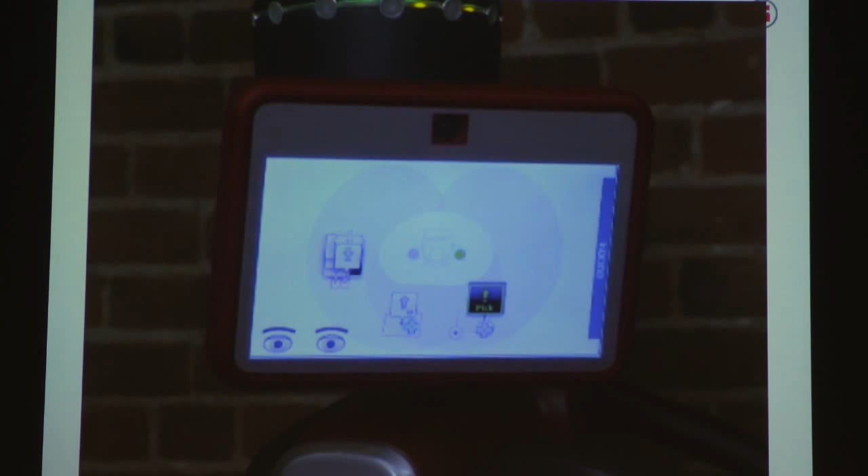Now she's training where to pick it up from. She's training the pick up after she trained the put down. So it says, yeah, that's a pick. And lastly, she's got to go in and say plus I. So she's going to say, yeah, I want you to see this thing that you're going to pick up.

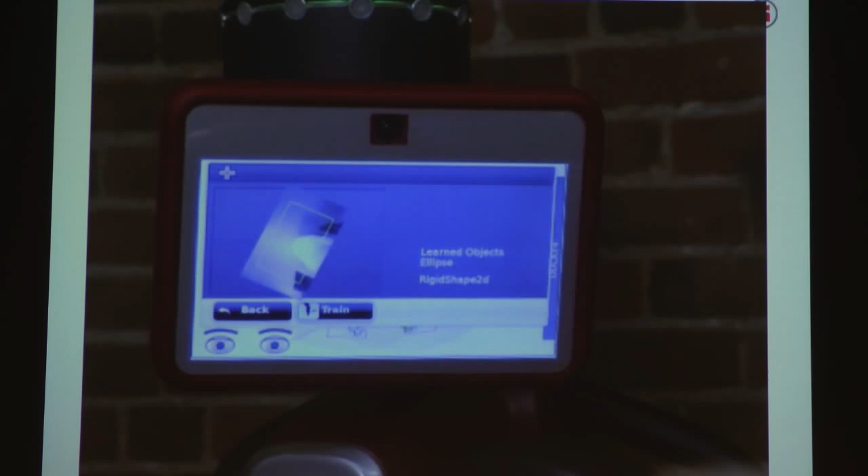So she shows it the rubber ducky, and it says, is that the rubber ducky? She trains the rubber ducky, and now the left hand, which is on the right of the screen, is going to pick up rubber duckies. The right hand, which is on the left of the screen, is going to pick up those white objects.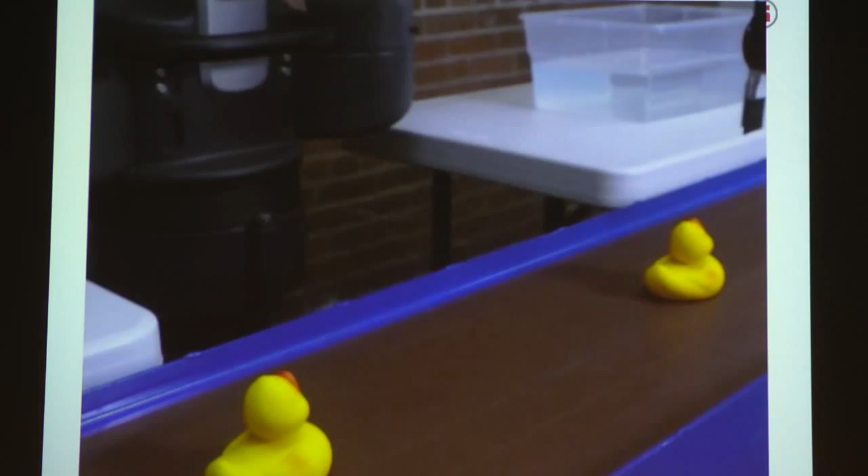So here comes a rubber ducky below the left hand. It's going to come down, pick up the—oh, it misses. Oh well, it knows it missed. So it goes and tries again. I can get that. Grabs the rubber ducky and goes and puts it in its swimming pool.

And meanwhile, it's going off and putting these objects in this pattern in the box.

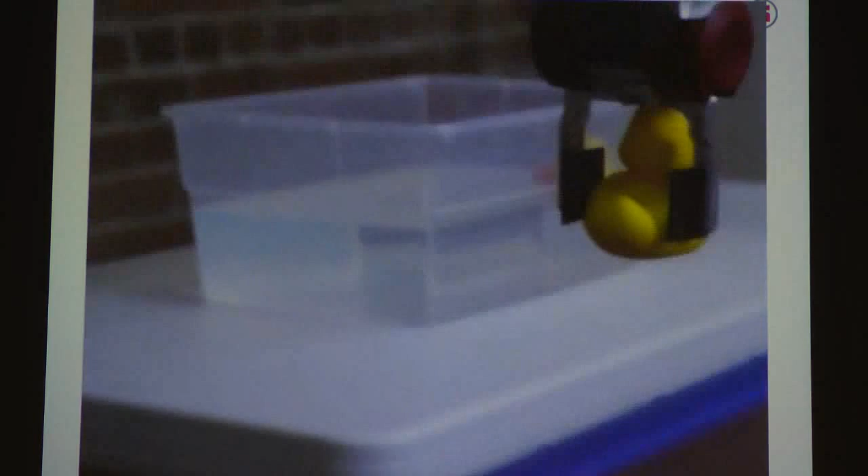Question? Yeah? How would you train it to do an inspection task, to look for defective rubber duckies? I'll get back to that because I don't want to miss some action here, but I'll get back to that.

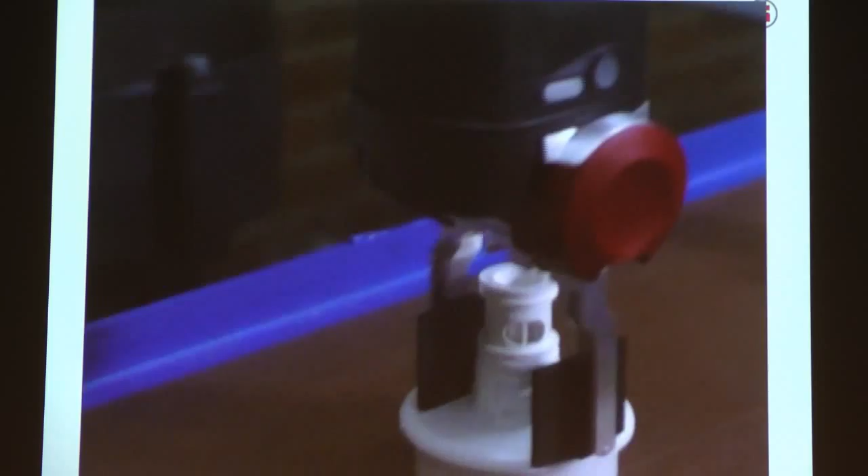So it's doing these two different things with the arms, and off it goes. Then I think I'm going to show you a little bit more of going deeper into the interface, just to show you that you can specify numbers.

First here, whenever you touch it, it tries to figure out where it thinks you are, so it's always guessing where you are. She's going to shut it down now, which is the same as pulling out the power plug, and you'll see it just very gently drops its arm. If you pull out the power plug, it does exactly the same thing. So you can be standing underneath it during a power failure. It won't hurt you. That was an important addition that we added.

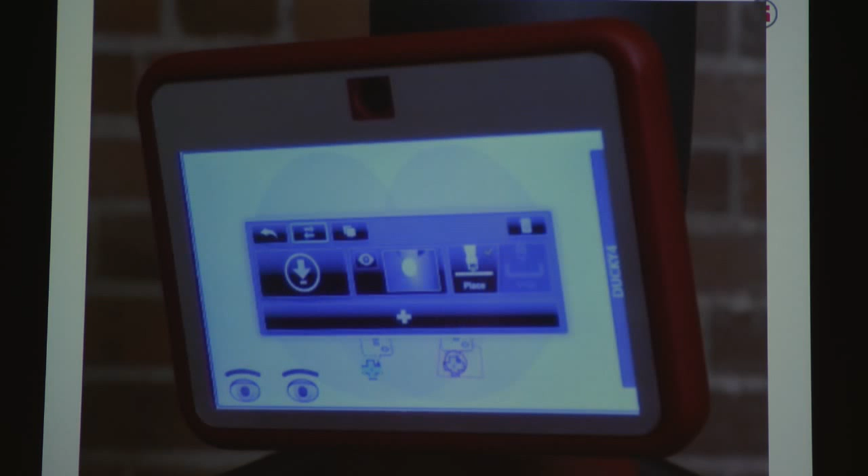And here, just going into one of these user interface menus, she's going deeper. She's going to put a count in there so you can set up numbers, etc. So you can go in and do deeper stuff.

There was a question—how would you train it to... where's the question, who? Look for defective rubber duckies. Oh, it's Chris. Hi, Chris.

First off, two things. The first's going to sound really wishy-washy, but I know how much you love everything I say, so in your particular case...

What we're doing is telling our customers what the robot can do and not expecting it to do more. Since we announced this, all sorts of people have come and been totally disappointed. Like one guy who writes a robot blog came and said, but I thought I'd be able to get it to have it on my yacht and steer the yacht around. How would I train it to steer the yacht? Well, you can't. Sorry, that's answer one.

Answer two, I said we're bringing out different versions of software over time.

The version 1 that's coming out, you can't do that, but internal versions you can. There's USB ports, you can connect up inspection systems. Another thing coming in a March/April timeframe will be machine tending - putting stuff into a machine, pressing a button. Those things will come out over time, they're not all there yet.

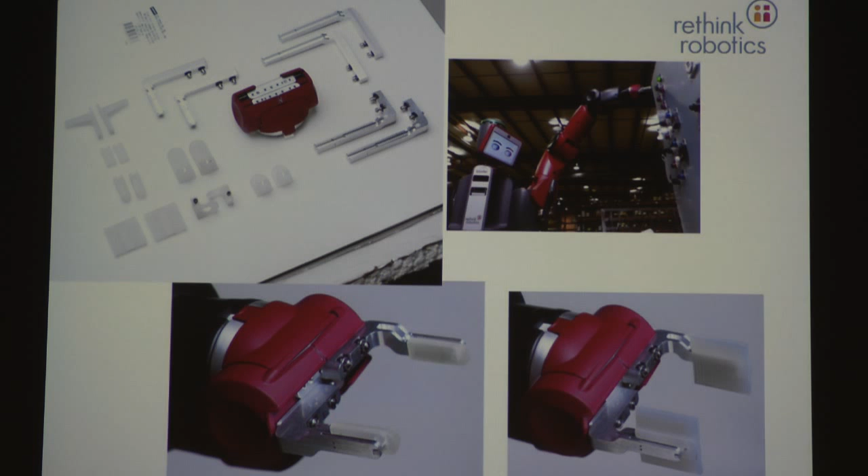I said we don't want to outsource hard engineering problems to users. One thing we do outsource, though, is building the hands. So there's a gripper kit - this is the electric gripper kit, and this is the pneumatic gripper kit - and I'll just show you how you install a gripper on the robot.

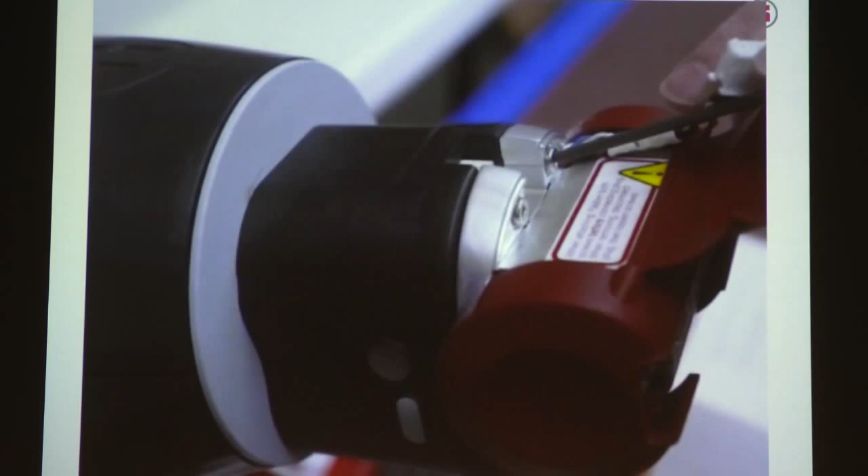She's going to open up the gripper box - it doesn't have all the parts in it, but you'll see the parts in a minute. There's different fingers, different finger pads, and instructions - we aim at the clarity of IKEA instructions. She's going to put the electric sliders on. By the way, this is a standard interface - we're hoping lots and lots of people will build new hands for this robot, so there's a mechanical, electrical, and software interface.

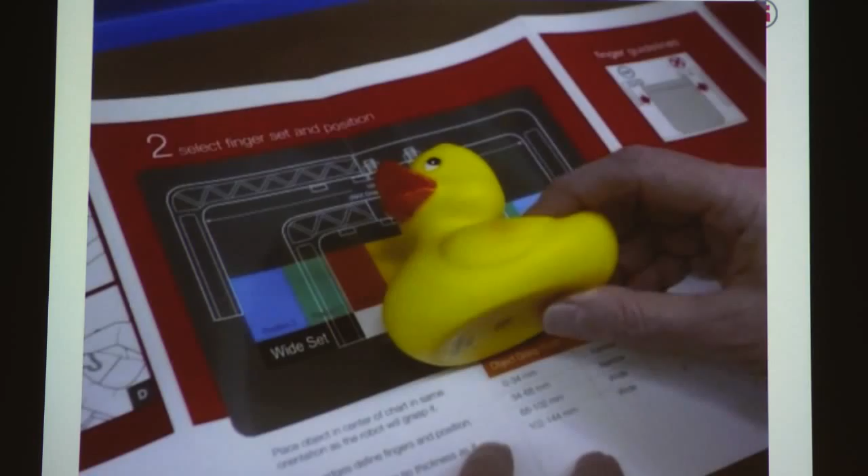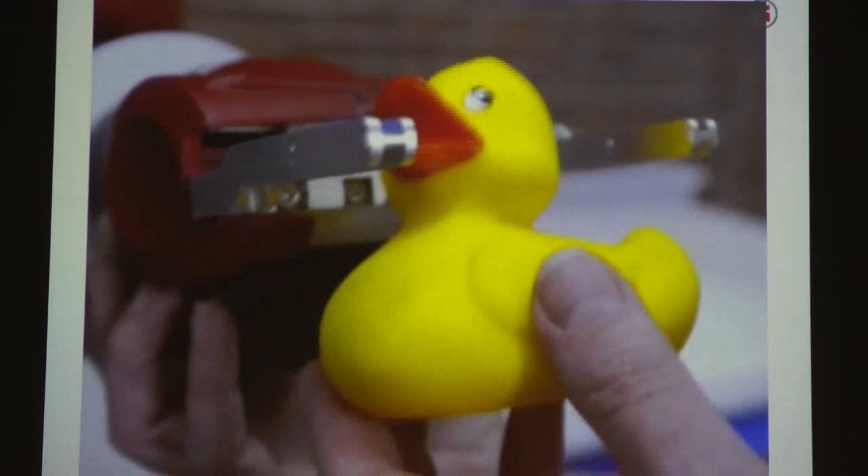Now she plugs it in, and immediately on the user interface it goes from no gripper to 'I got grippers.' Tell me about the fingers - well, she looks at her rubber ducky reference, selects the fingers from that pattern and what position she's going to put them in, puts the fingers on, and checks that this works.

And now she puts some finger pads on and makes sure that grasps well. So she's going to tell it which fingers she used, what fingertips, etc.

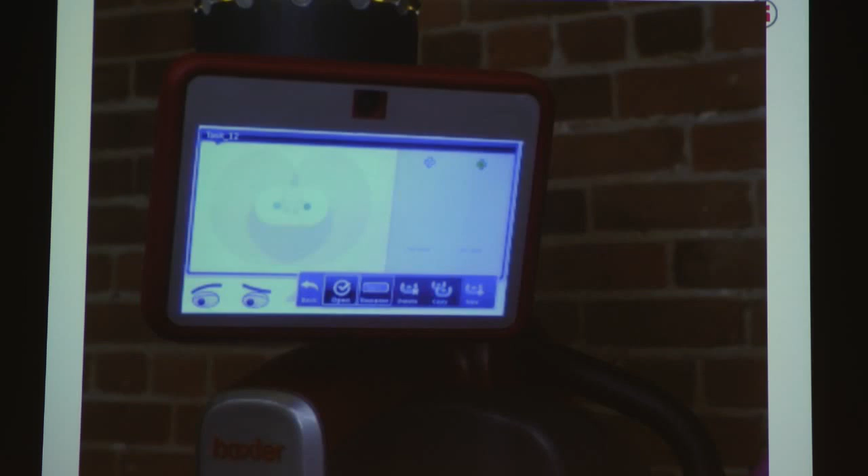But if a third party comes along and puts different fingers on, the fingers are visible from the camera, and it's trying to recognize objects - but what do the fingers look like that someone just put on? Instead of having to give a CAD model, if you put different fingers on, you can just say 'train' on this, and it puts up a different screen. It's got the camera in the hand - it rotates the hand in front of the screen, looks at what it sees with its camera, builds a visual model of the fingers, and now it's able to compensate for seeing those fingers in any image.

So there's an example of not asking the user to do something hard, getting the robot to do the hard thing instead. And here we're just scrolling through different tasks, and if it knows that different fingers are installed than the ones you trained it with, it will complain.

Things that people using Baxter don't need to know about are a whole bunch of things that used to be in industrial robots that aren't in this industrial robot anymore. We do have a protective stop, we do have a stop button - when Matt and I were boys, computers had emergency stops on them.

I don't know why, but they had big red emergency stop buttons, bigger in footprint than this. It's a good thing we don't still need them, because we'd be carrying them around. We have an emergency stop button on this robot because industrial regulations require it. I've never seen it used in anger, and I hope we never do - it would be a major disaster if we had to.

So there's many things that have traditionally been on industrial robots that aren't on this one. Certainly no fences around it, no key switch, etc.

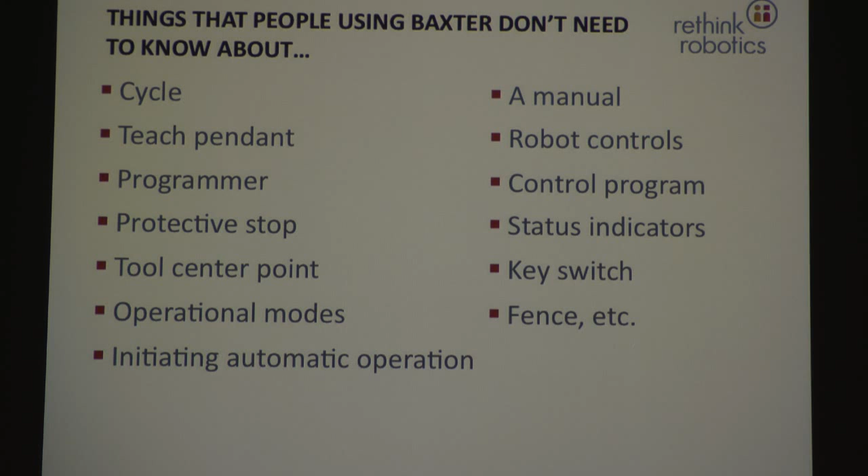We're going to bring out a ROS-based SDK, software development kit, early in the new year. There'll be some people here on campus on Monday just to talk to people and make sure we understand what people here would like in that.

Back in the early 80s, there weren't many mobile robots around, and then a few companies started building cheap mobile robots. Out of that came a lot of research on navigation, which led to simultaneous localization and mapping, which led through CMU to autonomous vehicles, which ultimately led to the Google car, which now everyone knows about. So it was having lots and lots of cheap platforms that completely changed autonomous mobile robot research.

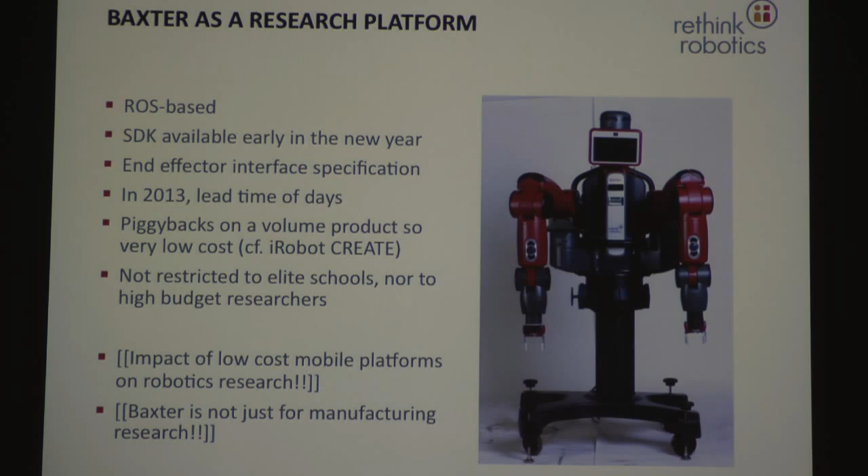And I think lots of people will use this robot for research - some of which will be pretty goofy, but some of which will be pretty exciting.

Goofy would be doing the Macarena. I know someone will do it - it's a goofy thing to do with a robot. But I expect people will do stuff with it that's not that. Did you do the Macarena? Maybe. The scary thing was, Sid told me earlier today that his algorithms would be used on every robot in the world. It's a fact - I guess they're all going to do the Macarena.

But I think people like Sid are going to do some really great things with this robot, and some really exciting different things which won't be in the manufacturing domain. I think that's where the real excitement for me in letting this out to the world is going to be.

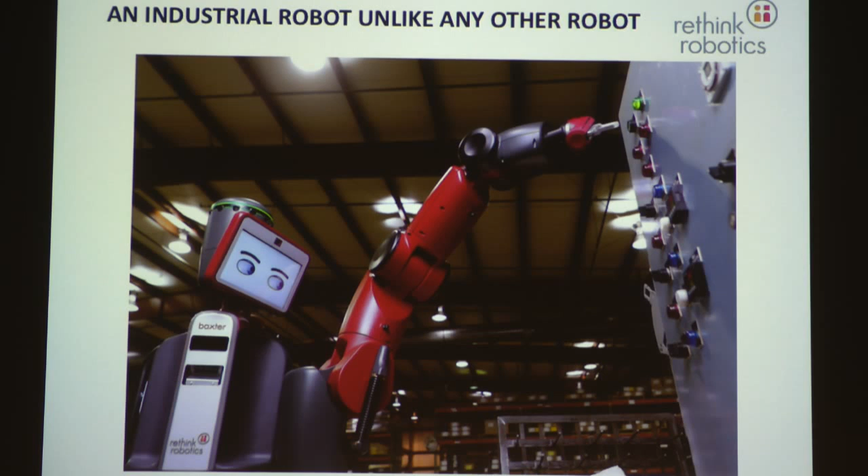We've been trying to build a cheap robot for everyone to use. I hope everyone likes it - either uses it in your factories, I know you all have factories, or use it in your research. The robot itself is not a research robot. It's a real product, which we're trying to build in very large numbers, made in the USA, and change just a little bit how manufacturing can be done. So thanks for your attention.